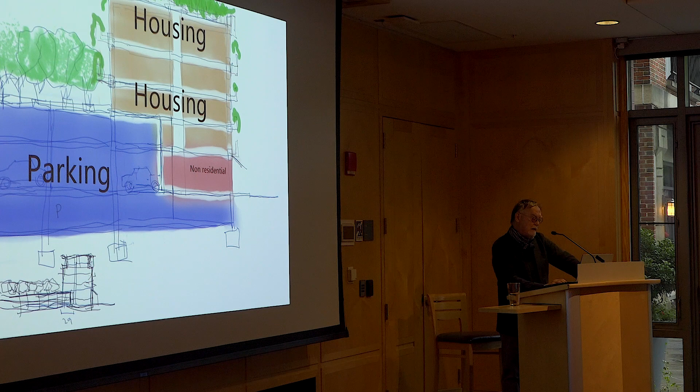They wanted it to be a green street, which, of course, there were a lot of ideas for, and that has not happened, at least as of yet. Anyway, a big one here was focused on the municipal parking lot, that big one where they just installed these electric charging stations. There's the potential section through that one, which means it could have some non-residential at the bottom, which could be civic, housing up above, and parking that would not only accommodate the housing, but would also accommodate intercept parking coming into town.

And then you immediately hop onto the golden loop. So here it is. There's the site, as you can see it in the base plan. This is a simple U-shaped building, 60 feet wide, stepped, green roof, double loaded corridor, parking below, and 2 levels of parking at the bottom level. That's that section I showed you a couple seconds ago. So that's that one, and that's the program for it.

But then it gets to be more interesting as you move across the street. This is a building that's been sitting there for a while, lots of controversy, but then it's wrapped around by beloved Conte's Pizza, and there's a fire station and what have you, all of which were designed around.

Now, the Valley Road School building, I find that building absolutely fascinating, and there's been a certain amount of discussion on that particular building. So here was the kind of footprint, if you will. There's the footprint, again, the standard kind of 60-foot wraparound that could or could not be as part of it. But what's fascinating about this one is that it's more or less the same concept with a couple of 3 kind of mid-rise, maybe 6, maybe 7-story focal point buildings.

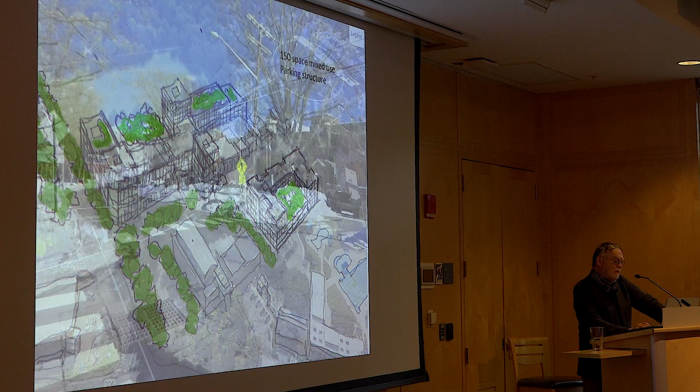But you can see what happens here is that not only would you have parking across the street, but you'd have parking on the back corner in the Conte's parking lot, if that got developed, again, surface parking. But one of the things that came up fairly strong on this one is people really like this building.

And particularly, so the doodles start out with, what happens if we just save that whole front facade? Let's just save that whole front facade. And they said, oh, no, it can't be done, it's too expensive, blah, blah, blah. I heard that over and again. Well, that's ridiculous. You come from Europe and they save damn near everything, and they build around it. There's no reason why it couldn't be done here. And then you simply build on top of it and around it.

And then you do something with Witherspoon Street, which means you actually paint the street to make it look like a plaza, and you connect both sides of the street together with a plaza that's painted on. So people going, what are we looking at?

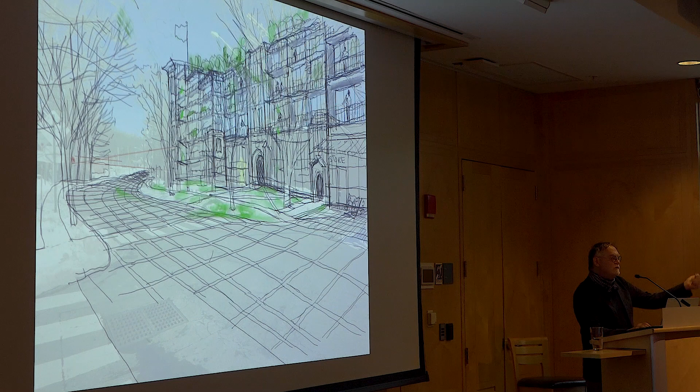I'm slowing down because I'm not sure whether this is a street or a plaza, and that uncertainty is what's given - it makes people slow down. In fact, if you go to Lowe's at Route 1, you see they paint it in front. We believe that could be possible. Anyway, that turned out to be fairly interesting, and that's the program for that one.

Number 9, and I'll only focus on one thing, not the Franklin Avenue site since Chris has that under construction, but the Salt Dome. The Salt Dome came up two ways. One, it came out of the Witherspoon-Jackson visioning process, where it became the number 2 ugliest place in town. The number 1 ugly place was the fence that the municipality owns on Paul Robeson Place - the town owns that fence but refuses to do anything about it. So you've got the ugly fence separating the town from the rest of those folks over there, and that's something that should be done.

But the next one was this one. By the way, Paul Robeson Place came up pretty negative too, but thank God both my contributions and lots of other contributions are really making that place change. But this Salt Dome is really ugly, really inappropriate, and it came in at number 2 for voted ugliest building in that area.

So there it is from the aerial perspective, and it's kind of interesting. You want to leave the school parking, you don't want to take that away, so you just focus on that particular lot. One of the key factors - that's what it looks like in the front. There's no continuity there; even if kids are walking from the neighborhood, they have to walk on the street to get to school. There's not even a sidewalk there.

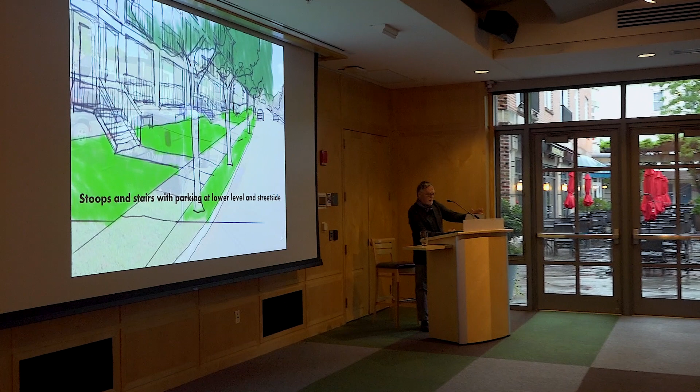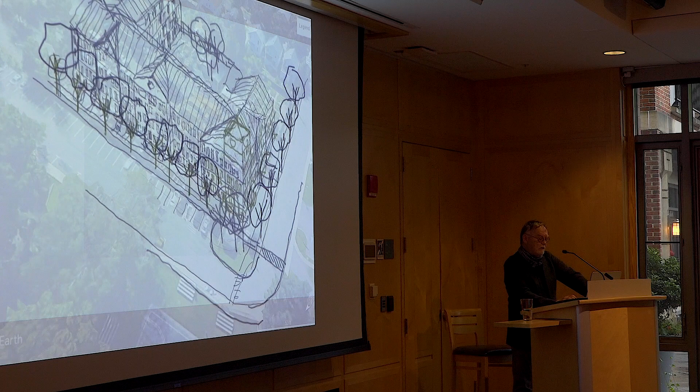So again, the same notion of what works best: semi-public space, plant a beautiful row of trees, raise it half a level above grade, with stoops and stairs and balconies in the front. And for those who need it, you'd have ground level access for ADA to get to the other sets of apartments. So that's the aerial view, that's the sketch. Again, it's a variation on a more traditional use with a tower on the corner, which occupies the corner and gives it some variation, plus a small plaza, green space, and garden in the middle, so everybody has access to a small amount of green space.

I'm going to bypass this. Number 10, 11 is right at the corner of Bayard and Nassau - it's the old municipal lot, which the Einstein Alley museum is proposing, and we have sketches for that. There's the parking lot behind Bank Street, and of course the seminary site, which I don't want to touch - we did sketches for it, but we're not going to touch that one. This one turned out to be the most interesting, I think, of all of them - along with the downtown shopping center and maybe the municipal complex, but this one was just unexpected.

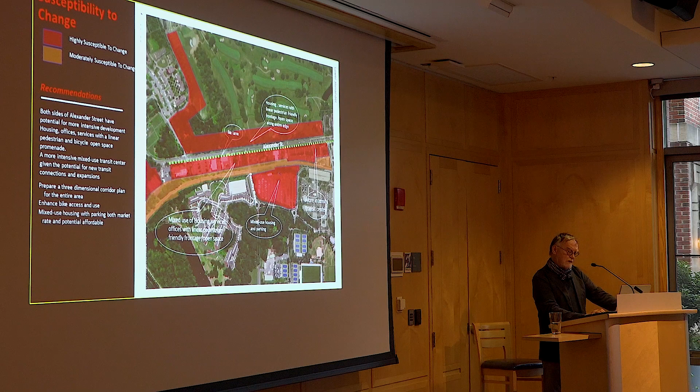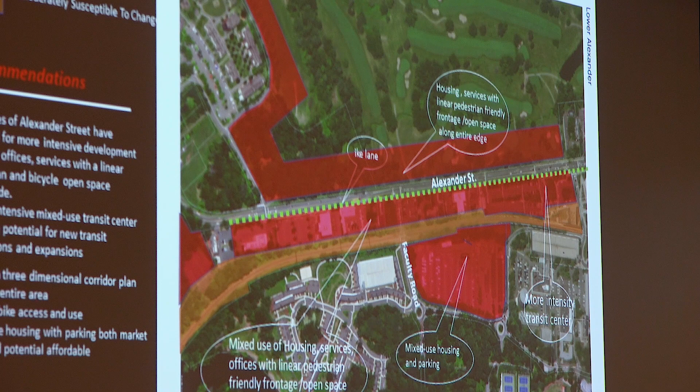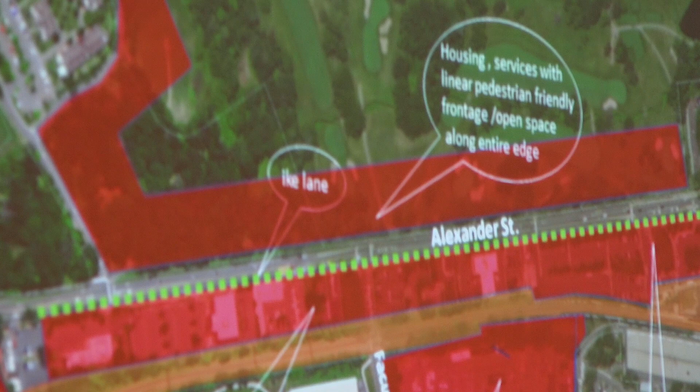When we did the susceptibility to change analysis, the whole parking lot area around the train station became red, but also the other side, about 100 feet into the golf course, became red too. My first thought was, what would happen if we developed along that whole golf course? So I talked to some friends from Princeton, and they were flabbergasted - no way in God's name were we ever going to develop their golf course. Okay, we'll stay away from the golf course, right?

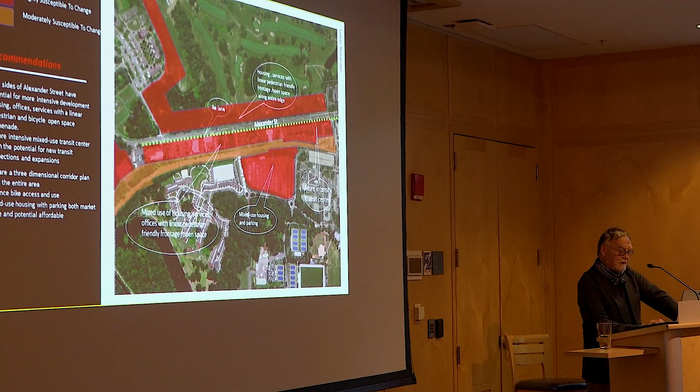But what about the other side? Well, the other side, that's fine. We'll just deal with the other side. So here's the thought: not only do you have a train station that literally has nothing around it for all practical purposes, what people wanted was a more intensive transit center. And there's no doubt that in the notion of transit-oriented development, this could happen.

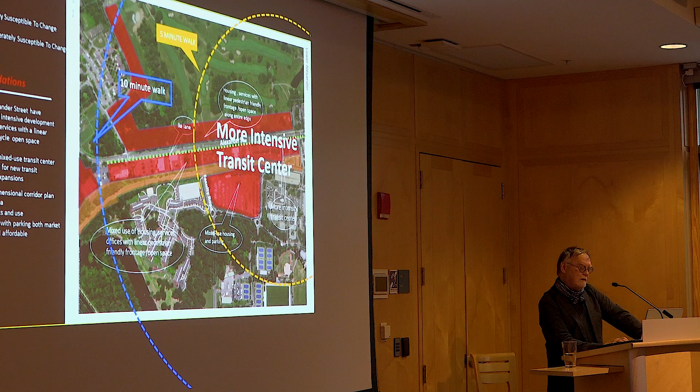Now, this one was a shock both to me and I think it probably will be a shock to you. But if you look at it now, this whole thing from there's the Lewis Center, there's the Wawa - this is all parking lot. This is all parking, and it's on a hill.

So here was the first thought: what happens if you develop a series of mid-rise buildings overlooking the parking lot across that green space, right next to the train station, which would be incredible, and put all sorts of parking both below grade and what have you to accommodate the existing and intercept parking coming into the town. Well, that was a pretty good idea.

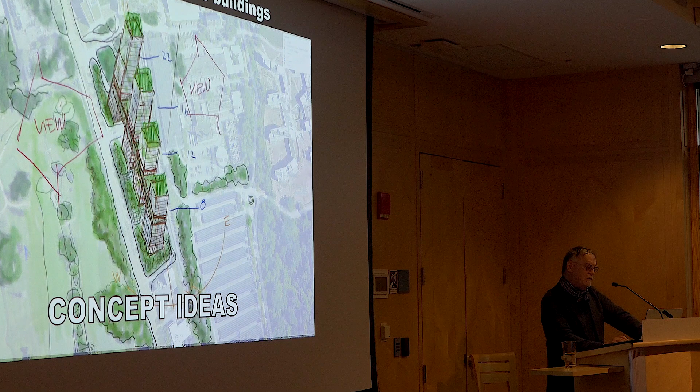And then went, well, what about this one? If you look at Deborah Berke's new campus, that's just got highlighted in several national magazines, what happens if you do the kind of twisty thing that she did? But on the other hand, what happens if you build these buildings and then tie them all together to make a coherent urban neighborhood with killer views over the golf course on one side and killer views of the university on the other side? I mean, it would be like right at the train station. It would be like numero uno fantastico, right?

So then you look at it and say, okay, let's see what this thing might look like, right? So remember, it's up on the hill - that's one of the great things about it already. And it's got a big parking lot in the back, so it's really nice. So this is what the first thought was of what these 4 buildings might look like.

But what happens if we made them completely green? Wind generators on the roof to really create something that would be quite extraordinary. And then let's put all the parking below.

Now, maybe it's just - and this was done well before Francoise and I spent our last 6 months in Europe - every city that we have gone to in Europe, you park underground. Period. Under the sidewalk, under the plaza, whatever, you park underground. And sometimes they're a little bit tight, but be that as it may, they tell you where to go, how many parking spaces are going to be there. You get the red and green lights, it tells you where the spaces are empty. They're painted and they have classical music in them.

I mean, it makes parking a kind of nice thing, as opposed to if we went now to the Chambers Street parking garage - it's asphalt, it's dirty, it's black, it's never been painted, there's no music, and it's pedestrian unfriendly. I mean, come on, there are ways to design parking structures which could happen.

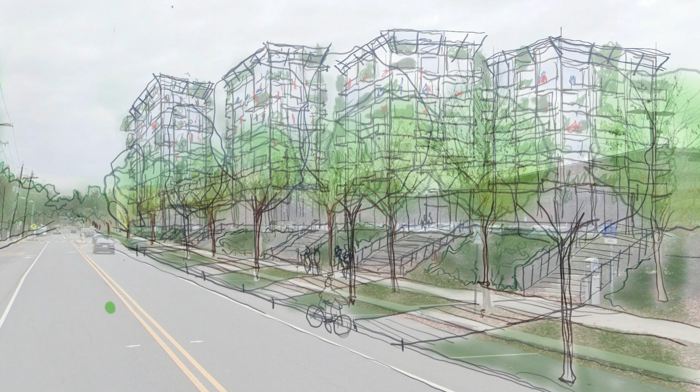That's something that could happen, and of course that's the service - again, there's a big program for that one. Okay, now I'll go through to the end and then I'll just turn it over to Kevin.